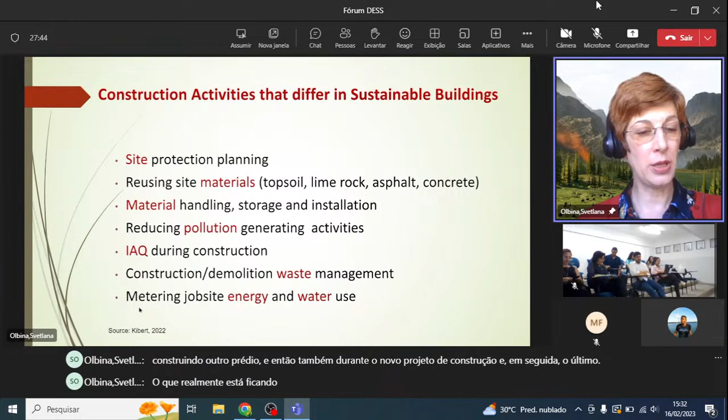And then the last one, which is really getting more momentum here in the States by construction companies, is that they monitor how much energy and water they use during actual construction on the construction site. So these are some major activities in general that could be done differently on a sustainable project.

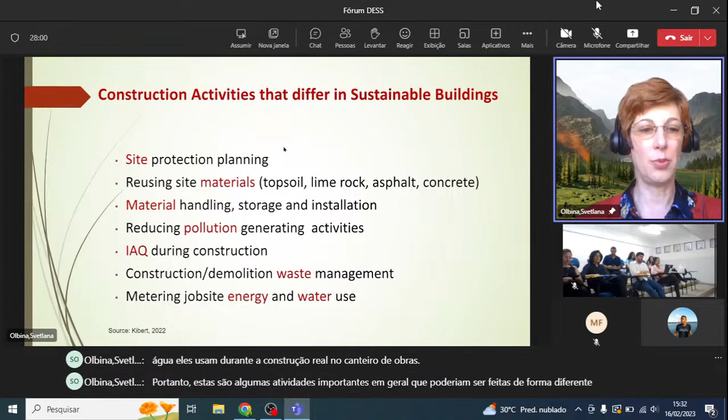So moving to the rating systems, if you can raise your hand, how many of you have heard of LEED? I can see the classroom, so that's good. One or two, three. Okay, and then the Living Building Challenge - I just want to see how much I should cover - and then Envision.

And I apologize, they're all US based except for LEED. LEED is internationally known, and actually in my sustainability class I showed last year an example of a building - a residential project in Brazil that got an award for the LEED project. I didn't put it in this presentation because it's out of scope, but I know it's implemented in Brazil too.

So all these rating systems are basically like checklists that you go through. They're all sustainable approaches, either in design, construction, or operation of the project. And when I'm talking about project, it could be a building, it could be infrastructure.

And then you go through this checklist, and depending on how many criteria your project meets, you will earn a certain number of points. When you add these points, you fall into a certain category and you get certification for the building. And please, if you have any questions, just stop me, interrupt me, jump in. I'll give you some examples of LEED in a moment.

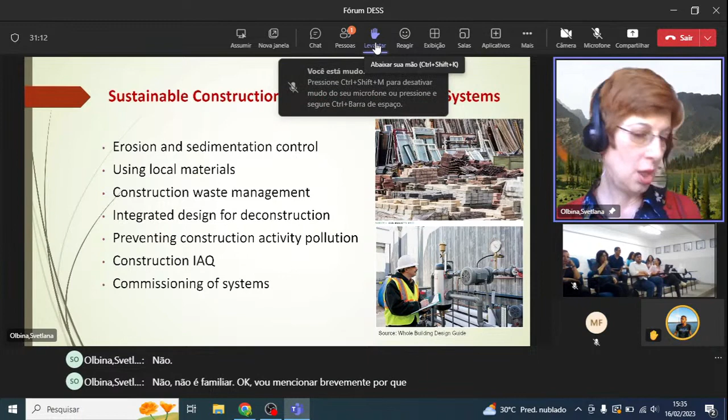No, not familiar. Okay, I'll mention briefly why commissioning is important and some flaws of the rating systems, including LEED.

LEED originally was focusing only on design. So we have a design team, including architect and mechanical engineer. They will design the mechanical system and run simulations in the software, and the software will give us the output and say this building will perform great, it's going to be low energy consumption, we're going to have good ventilation of the building.

However, some of these software are not always accurate, and it can misguide the designer. So what we need to do during the construction phase, before we install the mechanical systems like the air conditioning system, is make sure that system is working properly. That's commissioning. Once it's installed, we also want to run the system to ensure it works properly.

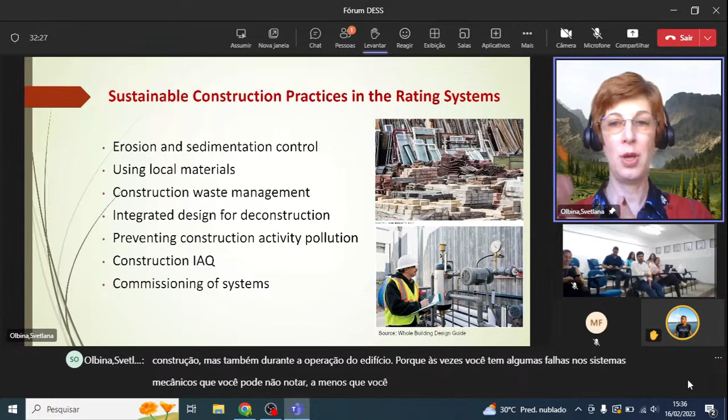This commissioning could happen during the construction phase, but also during operation of the building, because sometimes you have flaws in the mechanical systems that you may not notice unless you look at your energy bill and suddenly notice it's much larger, so maybe the mechanical system needs to be calibrated again. So commissioning is basically inspecting and testing of the systems.

Is there a question in the back? No? Question? Emilia, if you can unmute if there is a question. I have a question.

It's probably an easy question, but I just don't know. I've never heard about rating systems, so I don't know if that's an international concept or...

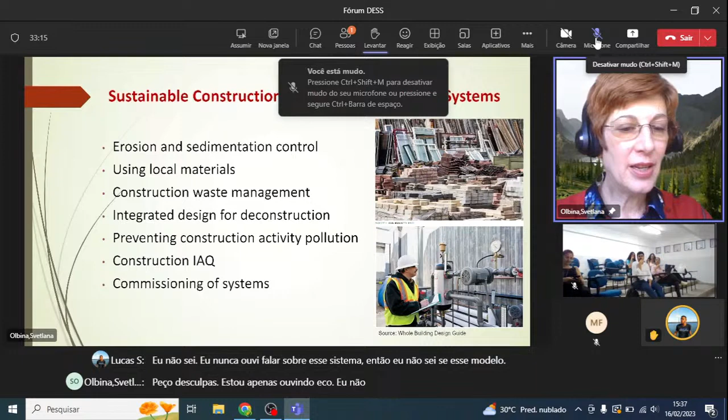I apologize, I'm just hearing an echo. I don't know if a student can come closer, or Emilia could maybe repeat the question. Turn off your mic a little bit. Oh, my mic, yeah, okay, I can mute. Okay, thanks. I am sorry, I didn't hear the question. Emilia? I don't hear anybody now, or I don't see anybody. Yeah, is it okay now? Okay, now I can see you.

Yes, great. Okay, so it's an easy question, but I've never heard about rating systems. So is it an international concept, or does each country have its own rating?

Are you asking about the quality of the mechanical systems, if it's rated, or about rating systems? No, it's about the rating. I suppose there are a few rules that the construction has to match. Does every country have its own rules, or is it like an international thing?

There are international ones, like BREEAM. It was created in England, but many countries use it. AQUA, which is HQE, is from France, but many countries are using it; Brazil adapted it and called it AQUA. LEED was created in the United States, but is universally applicable, and if any country wants LEED certification, they have to go through LEED in the United States to certify it. But each country also created their own ratings, like Brazil has Selo Procel, Selo Casa Azul, Selo B. They have many. Each country also adapts their own, but there are some international ones.

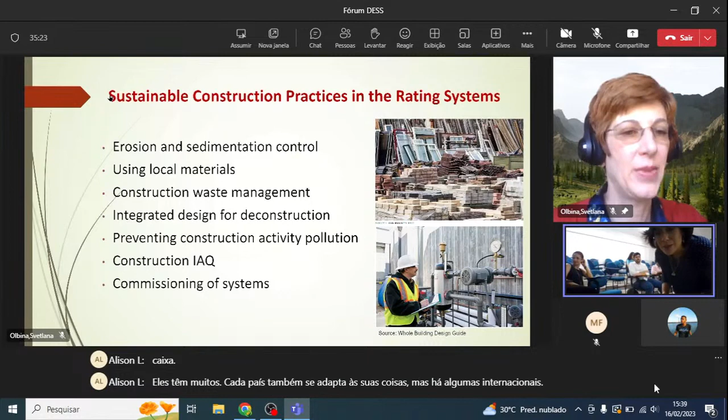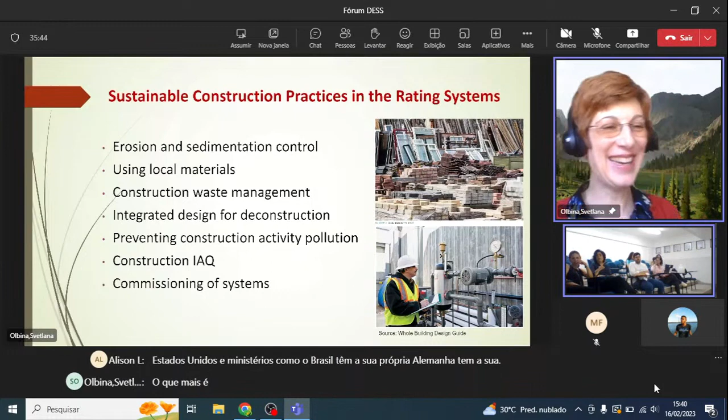Is that correct, Svetlana? This is correct. What's happening is LEED is gaining momentum around the world. It originated in the United States, and Emilia is right, Brazil has their own, Germany has their own... is it possible to mute? I'm sorry, it's just an echo. So yeah, Emilia is right, and it's a great question.

If you want to go with LEED, for example in Brazil, you will need to prepare the certification documentation yourself, but then you need to go through USGBC, the United States Green Building Council, which is a third party, and they verify your project. So we cannot just say, I think it's a LEED project, and they give it to us. You need to go through their process.

And there is Green Globes that originated in Canada. Singapore has their own. So yeah, Emilia is correct, there are so many different rating systems, and there is no one universal one. But LEED is kind of the most popular here in the States. And I do agree, I will not show that today in the presentation because it's a different lecture.

But the buildings here in the States that are high performing really didn't aim to go for LEED or Living Building Challenge. They just wanted to do the right thing. And then eventually, because they did design and construct great buildings, they got both LEED and Living Building Challenge. And some of them WELL.

WELL is another rating system that we use here that focuses on building occupants. In terms of performance of mechanical systems and energy consumption, we follow at minimum International Energy Conservation Code, but it's not mandatory. It's really interesting that it's based on the city and the county, and we could adopt it or change it. But in general, we go by that International Energy Conservation Code, which is not as stringent as LEED and Living Building Challenge.

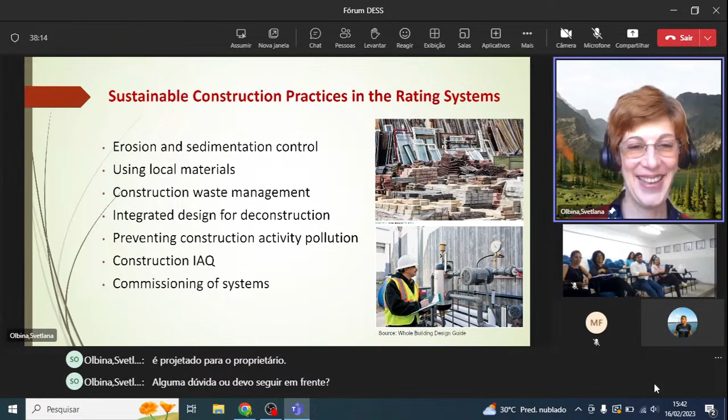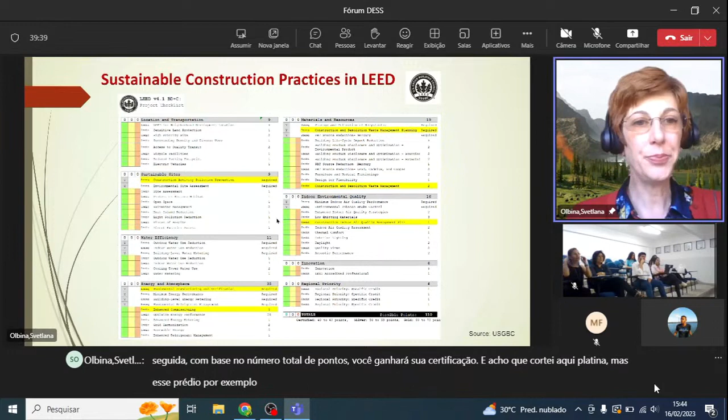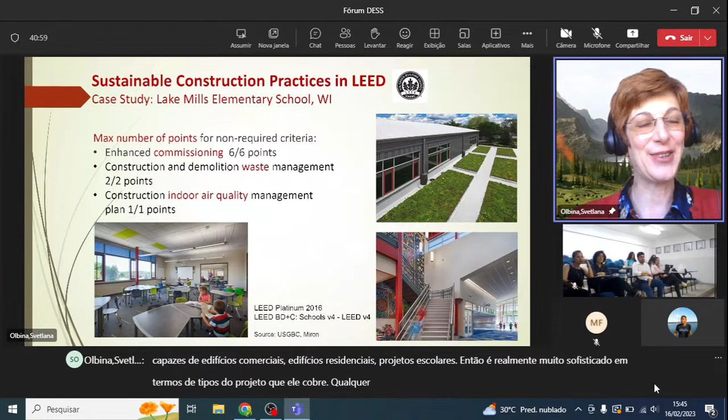LEED has several different LEEDs, it's not only one universal LEED. So we have for commercial buildings, residential buildings, school projects - it's really very sophisticated in terms of the types of projects that it covers. Any questions about LEED before I go to LBC? No, okay.

Are you familiar with salvaging as a term? Do I need to explain? If you raise your hand, I will understand. I should explain maybe - yes, okay.

So, for example, at the end of the life of the building, if it's demolished or deconstructed, we want to be able to salvage that material and then reuse it on another project. Here in Fort Collins, where we are located, we have a store where you can go and buy salvage material and reuse it for another project.

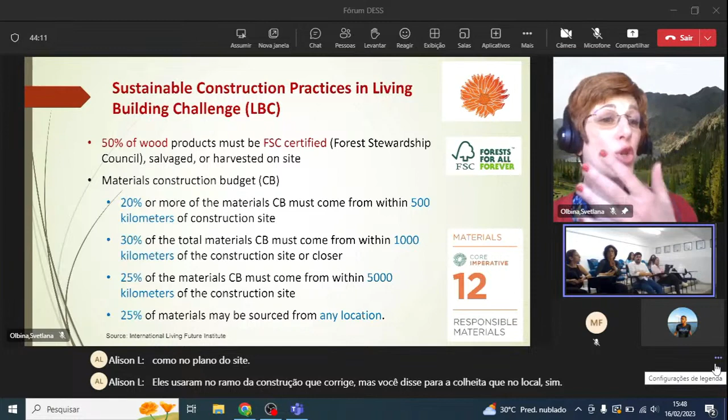I need to unmute. The point is to minimize that transportation, right? Because it's time and cost, and then CO2 emissions - that's the problem. When I lived in Serbia, everything is local, right? We build from brick a lot, and brick is manufactured within 25 kilometers, so it's never far. We didn't have that luxury of importing materials from other countries because it's very expensive, so out of necessity, we use local materials.

So going back to Living Building Challenge, they want all materials, and they kind of broke it into 4 equal categories in terms of amount of materials coming from different regions. 20% of materials will come within 500 kilometers. In the United States, 500 kilometers is not a lot because we are a big country, and maybe it's similar in Brazil. But in Serbia, that's the entire country, right? So it needs to come from very close proximity.

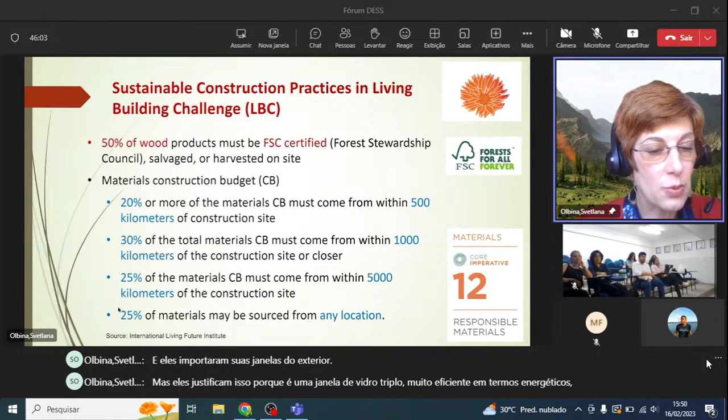Then another 30% within 1,000 kilometers, and then 5,000 kilometers. So if you want to import something overseas, it's not really sustainable, but that could fall within this 25% of materials. We do have buildings - we have a Living Building Challenge building that was first certified in Seattle, and they imported their windows from abroad. But they justified that because it's a triple glazed, very energy efficient window that could fall in this 25%. So there is a little bit of flexibility.

Another category that Living Building Challenge looks at is net positive waste. So for example, if we don't have any waste during construction, that will be zero waste. But if I'm reusing some materials, like we talked about salvaging materials, then I'm having this net positive waste - I'm now reusing previous material, I'm not using raw materials anymore.

So that takes me to that category of net positive waste. The requirement of Living Building Challenge is to have one salvage material per 500 square meters. That would be most likely commercial building, I would think, in Brazil and here in the States. So for every 500 square meters, one salvage material, which I think is not hard to achieve. It's possible, right?

Another requirement for this rating system is that we want to collect this waste material. So again, going back to waste, going back to reusing or recycling, there needs to be a plan. And then they want us to divert about 80% of all construction waste from the landfill. So now we need to be creative and think how we can use this waste for something else.

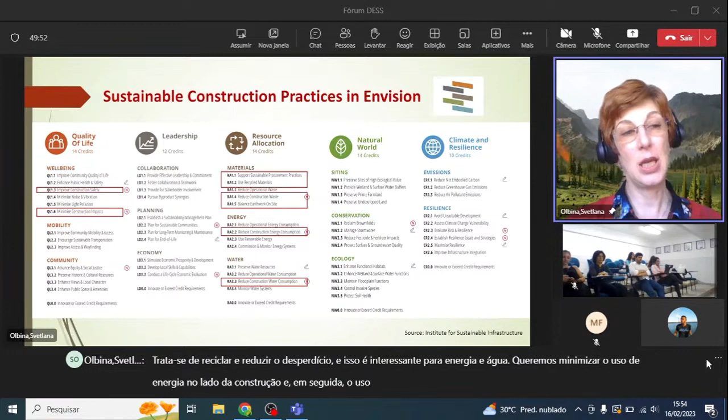This is interesting for energy and water. We want to minimize the use of energy on the construction site, and then use of water. Here in the United States, we use potable water for concrete mixing. We need clean water, which is fine for concrete, but it's potable water. So it's a huge problem.

Is it the same in Brazil? Or I think we have somebody working on concrete, one of the students. No? You're on mute—I need to unmute myself.

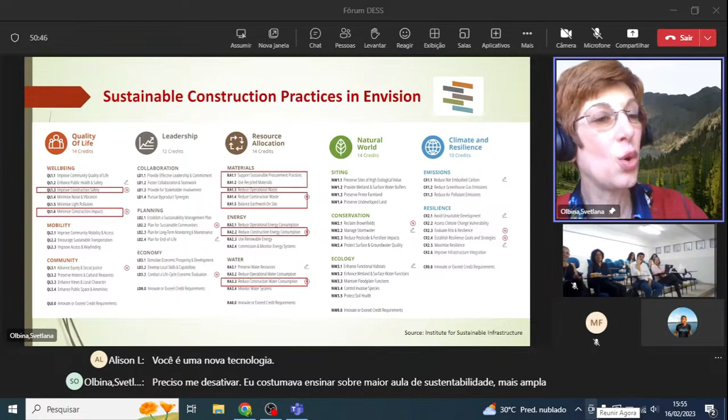I used to teach a bigger, more broad and comprehensive sustainability class, where we talked about quality of water and scarcity of water. I know there's a problem with water availability for people in Brazil, Africa, and Asia. Here in the States we're spoiled because we have potable water all the time that is good quality, but we use the same water for concrete, unfortunately. So it's a huge problem.

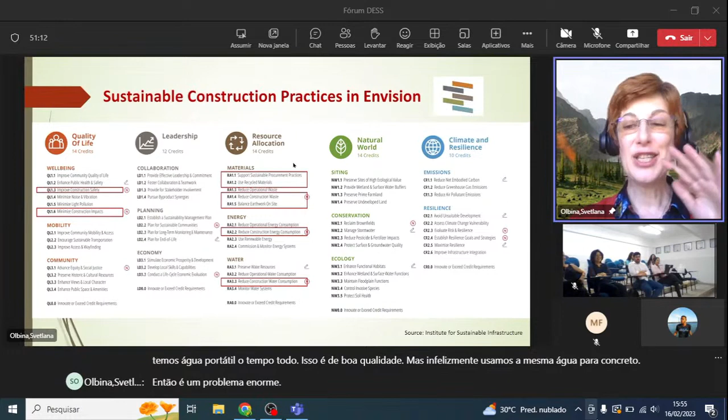Anyway, this is just a brief intro to rating systems and how they consider construction activities. Now we're ready to move to more specific topics and how we can do things differently during the construction phase. I was thinking of focusing only on 5 major topics, since there are many others, but we have limited time and maybe we can go a little more in depth: how we protect the site, how we handle materials, indoor air quality, waste, and construction equipment at the end. So these are some topics we can look at.

So if I assume you've heard about controlling erosion on the site—is that right? It's a civil engineering program, right? Let me mute. Here it's a very big problem.

We have some hills, and the problem is that the population has been constructing on these hills around the city. When it rains, we have—I don't want to say—but slides, earth slides, and people get killed. They try to put plastic to avoid water filtrating and carrying the earth, but we have this problem here in the city.

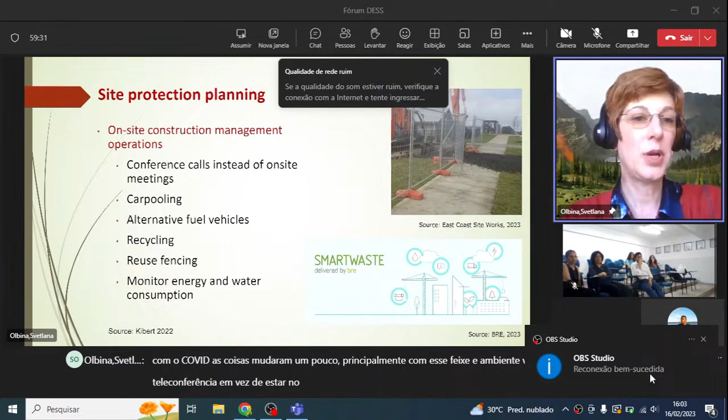It's possible to have a conference call instead of being on site. That's another strategy—it saves time, no driving, no pollution. So if it's possible to do a conference call, that could be a viable solution.

I do like everything in person still, and I wish I were in Brazil, but imagine how long it would take me to get to Brazil and give a one-hour or hour-and-a-half lecture and then go back. So it's really about convenience. Carpooling, I already mentioned.

Here in the States, people are leaning towards electric vehicles, but they're still expensive, even for us. They're not as affordable as a gas-based car, but that's the goal for the future—using more electric and hybrid vehicles rather than fuel-based ones. I'll show at the end a few slides on electric construction equipment.

We already spoke about recycling and reusing fencing. For example, here on the right you can see a picture of a fence that shows the boundary of the site and can be easily disassembled and reassembled, versus one built on site, demolished, and taken to the landfill. So it's really important to think about reusing fencing too.

I found this really interesting software. I haven't tested it yet and I'm not sure if it's free, but it would be interesting to try in class, because it's developed by the Building Research Establishment in the United Kingdom. This organization is famous for developing and administering BREEAM, another rating system—actually the first rating system in the world for sustainable buildings, even before LEED.

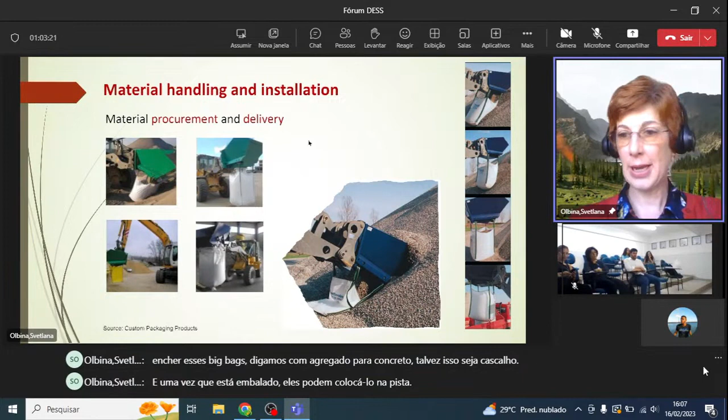If you look at this slide, this is a company that uses heavy machinery to fill these big bags, let's say with aggregate for concrete, maybe gravel. Once it's packed, they can put it on the truck, or use a big crane that will lift these bags and maybe put them on the train. We transport with the train too, a lot, here.

Eventually you bring it to the site, you use the material, and these bags go back to the manufacturer to be reused for the next cycle. It's a very simple strategy, but very useful, and it minimizes waste because we are planning better material use on the site.

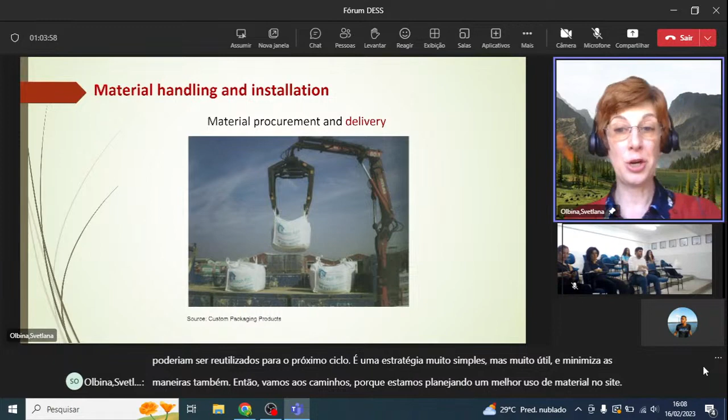I mentioned earlier that usually in a very dense urban environment where sites are small and there's no space around the site, even to park the truck, we may need to do just-in-time delivery. That means if I'm installing a gypsum board for walls or ceiling today, I'll deliver it this morning and then start installing it today.

There are a couple of benefits. One is storing — I don't need to store it on the site since I don't have much space. The second is I don't need to cover it. What is the problem with gypsum when it comes to moisture? Any idea? Maybe I'll stop here and ask the class about gypsum as a material and how it works with moisture.

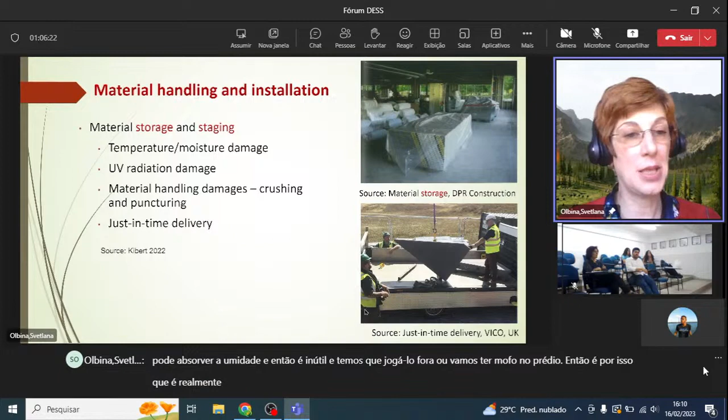Great, that's exactly what I was looking for. There are gypsum boards more resistant to water because we add certain additives, but in general, traditional gypsum board absorbs moisture. That's a huge problem, and we don't want that to happen during the construction phase. If I'm storing it on site and don't protect it, it may absorb moisture and become useless — we have to throw it away, or we'll have mold in the building. That's why it's really good to think about just-in-time delivery, because then I don't need to cover it and I avoid this kind of problem.

Any plastic-based materials exposed to the sun may suffer UV radiation damage and become useless, so we need to discard them and bring new material. If the material site is not well organized, with equipment and people moving around, there's a chance the material will get crushed, punctured, or damaged so we cannot use it again. There are all these little things we can take care of to be more efficient with material.

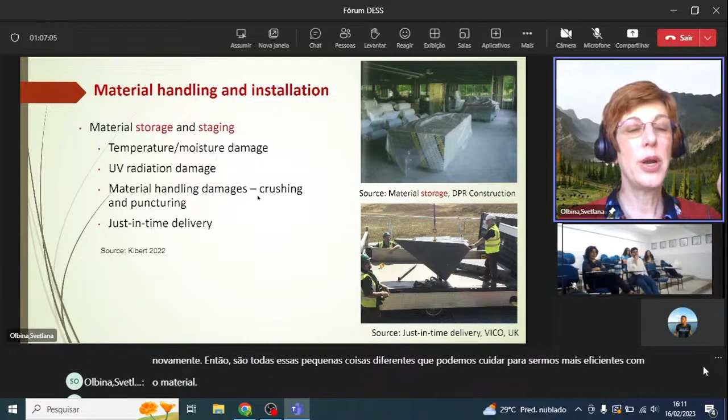So it is really important to protect our workers. That's part of social sustainability. When we teach our students sustainability here in the States, we talk about environmental, economic, and social sustainability. They're all very passionate about environment, but when it comes to economy, fair trade, affordability, equal opportunities, and social sustainability like health, they're not there yet. So it's my job to encourage them to think about these topics. One is worker health, right?

So again, we need to make sure that they're not exposed to VOC. Are you familiar with the VOC term? Volatile organic compounds. I don't know if it's the same term in Portuguese, it may be different, but this would be, for example, off-gassing from carpet, right?

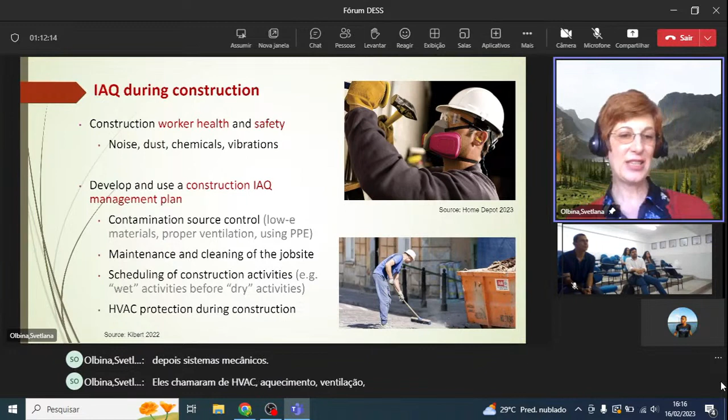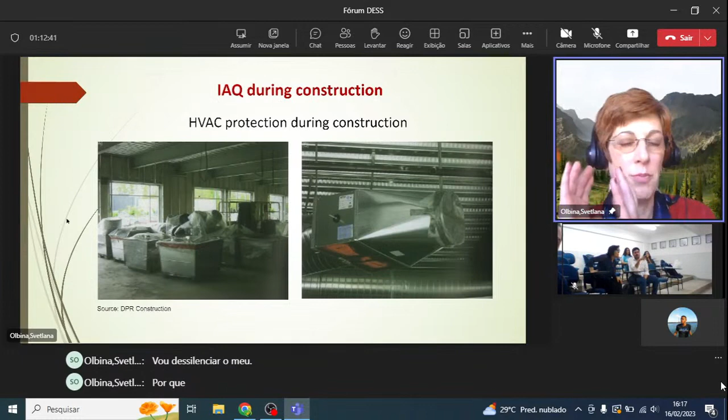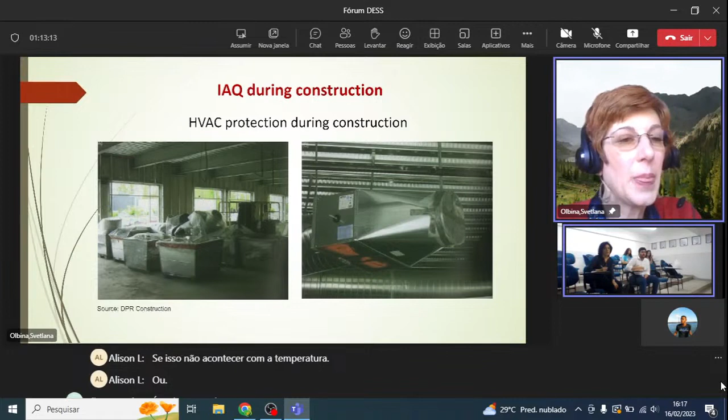It's really about indoor air quality. We want to make sure that no dust from other activities gets inside the ducts, right? And on the right side, you see it's already installed in the ceiling, and it's again covered for the same reason, because if anything enters the ducts and we start running the system, it could be dust, it could be mold, so we want to prevent that.

For the temperature, I would say maintaining the temperature once the building is completed and mechanical systems work will be part of commissioning.

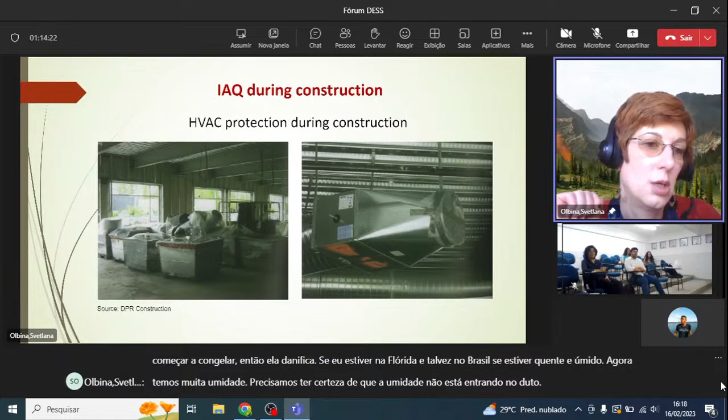I agree, there's another thought I'm having: it could be different in a hot, humid climate versus a cold climate. Like yesterday, we had -7 Celsius, so if I have any water, it's going to start freezing, which damages it. If I'm in Florida, or maybe in Brazil, if it's hot and humid, now we have too much humidity, and we need to make sure that moisture is not entering the ducts during construction. So there are a lot of things we need to think of to ensure good indoor air quality during construction and when the building is occupied.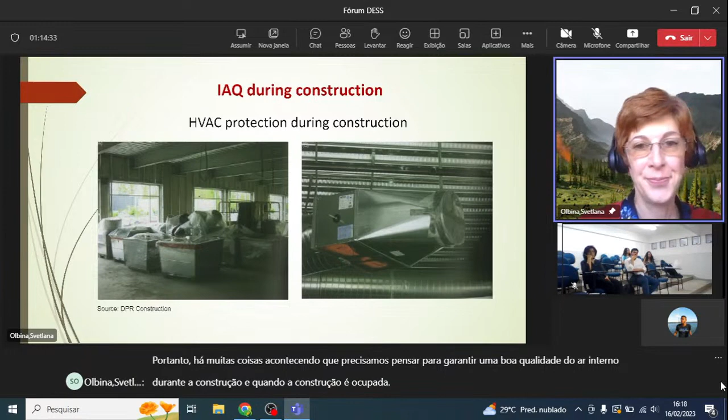Moving to waste. This is not a very encouraging slide, and this is for students doing masters, PhD, and maybe undergrad research—I always explain this in my class. If you look at this data, it's from 2018. I went to the Environmental Protection Agency website where they publish this information. As you know, when we do surveys or research, we survey industry for about a year, then collect and analyze responses and write a report. That takes another year, so by the time data is published, it's already two years old. Probably during COVID they didn't do much.

What's discouraging is when you look at the United States, we had from just construction 136 million tons of waste in '96. That's more than 25 years ago. In about 20 years, this amount went up 4 times—we're producing 4 times more waste in construction than we used to 20 years ago.

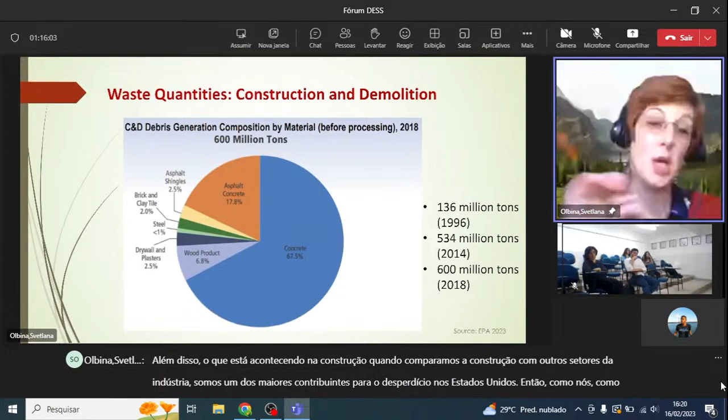Also, when we compare construction to other industry sectors, we are one of the largest contributors to waste in the United States. So how can we fix that? If you look at the type of waste, the large majority comes from concrete, either asphalt-based or regular concrete, and this is more than 85%. So any idea what we could do about that? I do have some suggestions, but since one of the students is doing research in concrete, what could we do with this concrete waste?

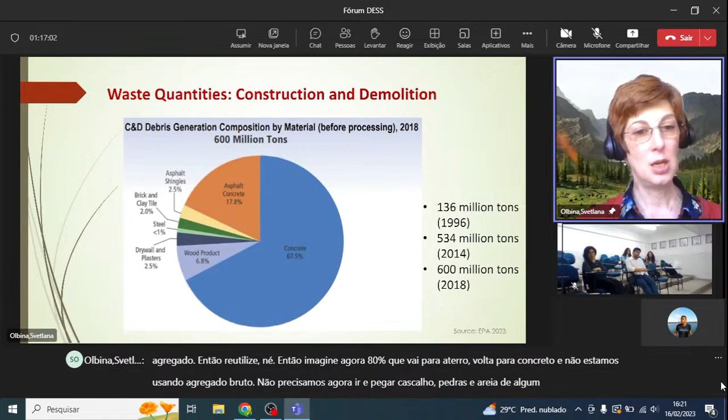Maybe we can grind it and reuse it as an aggregate. That's what we teach our students here, right? And that's what we're trying to do—we can use it as an aggregate, so reuse. Imagine now 80% that goes to landfill goes back to concrete, and we are not using raw aggregate. We don't need to go and get gravel, rocks, and sand from somewhere else. So that's a great solution.

We can reuse brick and clay. We can recycle steel. And then think about reusing these asphalt-based materials or gypsum-based materials again. So how can we recycle, at least if not reuse?

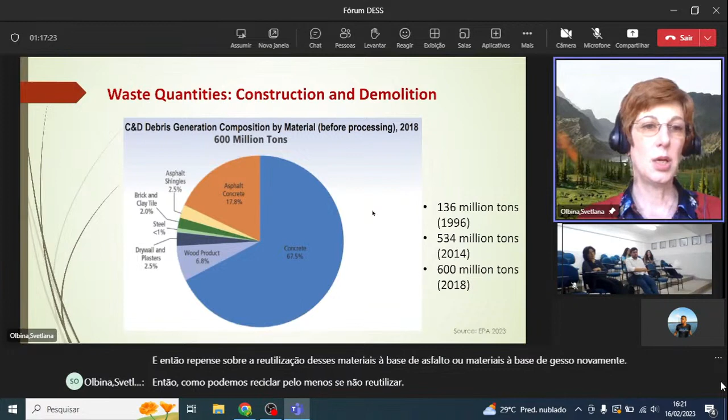Some problems we have here in the States—we like to build big, right? Our houses are huge, which is not necessary. I grew up in a small house with my parents and sister, and it was 100 square meters. In Serbia, that's a huge house; in the United States, it's a small house. It's all this cultural thing, like what is considered normal. So I teach my students we need to build smaller homes because we don't need a big home. Why do we need 200 square meters when we can live in something much smaller?

When we decrease the size of the building, we decrease material use. Also, as an example, when I worked for the curtain wall company, I would design the curtain wall, take quantities off, and order material for these aluminum profiles. Whatever I estimate we need for a project, we'd add 10% to that for waste. Can we be more precise and reduce that waste factor? Can it be 5% or less? That's the goal—to minimize these waste factors.

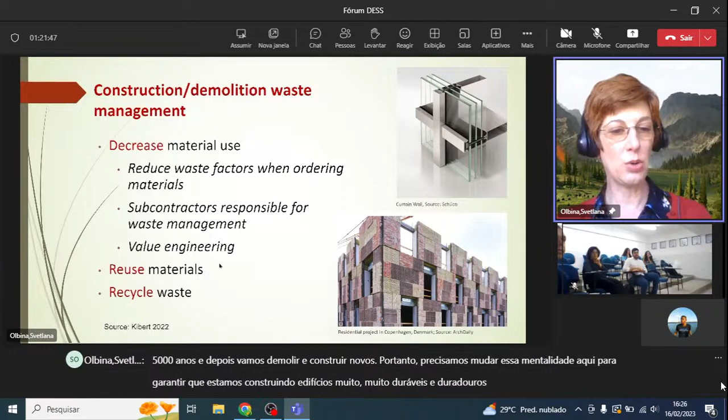So brick is probably the winner, right? And we are always talking about end of building life. Really, in sustainability, we want buildings that last a long time. I'm sure in Brazil you have buildings that last for 1,000 years, like we have in Serbia, some monasteries that have been around for a very long time. But in the United States, we build buildings to last 50, 100 years, and then we demolish and build new. We need to change that mindset here to make sure we are building very durable, long-lasting buildings. And then we already spoke about reusing and recycling materials.

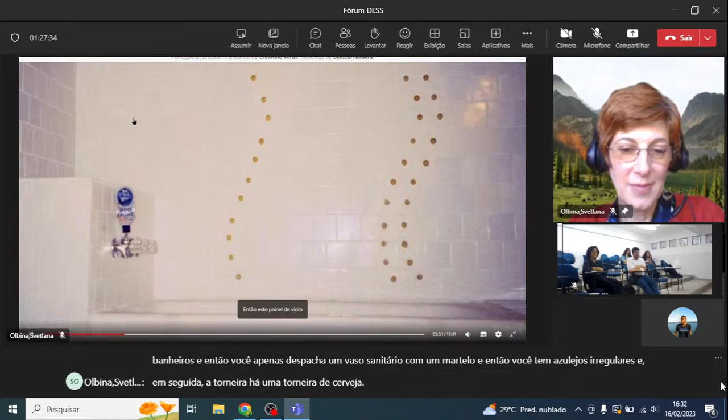This panel of glass is the same panel of glass that occurs in every middle-class front door in America. We're getting tired of it, it's kind of cliched now. So if you put it in the front door, your design fails. So don't put it in the front door, put it somewhere else, it's a pretty panel of glass. But then if you put it in the front door, people say, oh, you're trying to be like those guys, and you didn't make it. So don't put it there.

Then another bathroom upstairs. This light up here is the same light that occurs in every middle-class foyer in America. Don't put it in the foyer. Put it in the shower or in the closet, but not in the foyer.

Then somebody gave me a bidet, so it got a bidet. This little house here, those branches there are made out of Bois d'Arc, or Osage orange.

And these pictures will keep scrolling as I talk a little bit. In order to do what I do, you have to understand what causes waste in the building industry. Our housing has become a commodity, and I'll talk a little bit about that. But the first cause of waste is probably even buried in our DNA. Human beings have a need for maintaining consistency.

So I would stop here because now it's becoming more like a philosophical discussion. But I just want to show this first few minutes because it's a nice example of how he found different materials that would otherwise go to the landfill. It would be waste, and he reused it for the house project. So just as an idea.

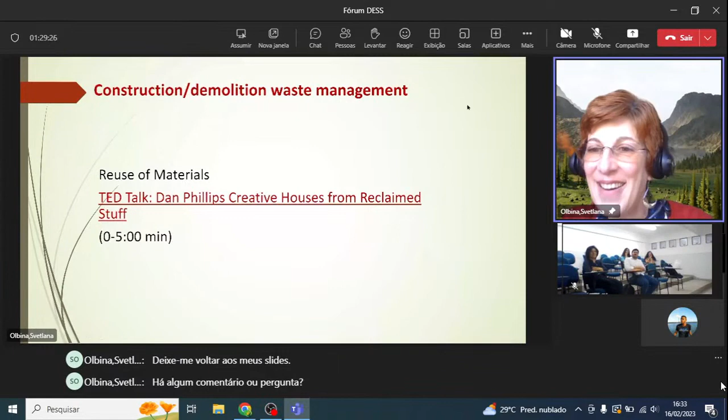What's interesting, when it comes to waste, we can recycle about 75%, three-quarters of all materials. We already mentioned things like wood, concrete and masonry, let's say brick, aluminum and steel, and gypsum board, so major materials we typically use for buildings are recyclable.

We can also prefabricate, I'll show you some prefabrication examples. We talk about buying materials in huge quantities and big packaging in bulk, which also helps with minimizing waste. And then deconstructing a building rather than just demolishing it and reusing that material, so I'll have one example, a short video on that. And then recycling as much as possible of demolished material that cannot be directly reused.

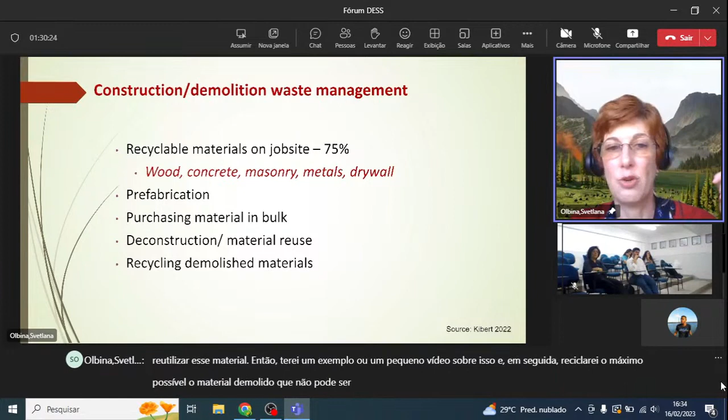So I'm not sure, do you see this kind of dumpsters on Brazilian job sites? You do? Great, oh, that's a great job. So separate materials, right, for recycling.

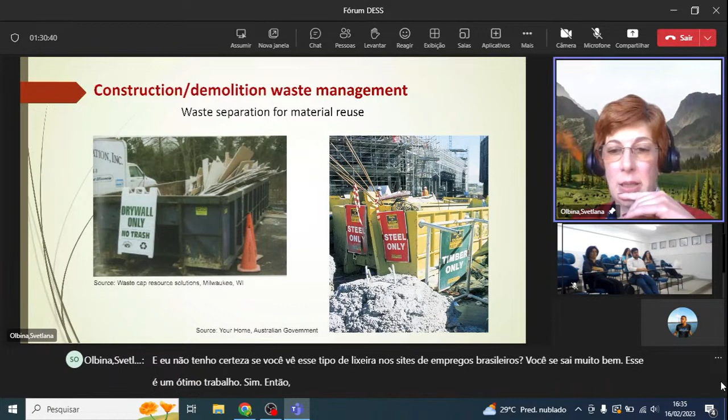And this is their example, like how they have these dumpsters that separate waste by type. This video is coming from the Environmental Protection Agency, and it should run here without problem. I was able to embed it.

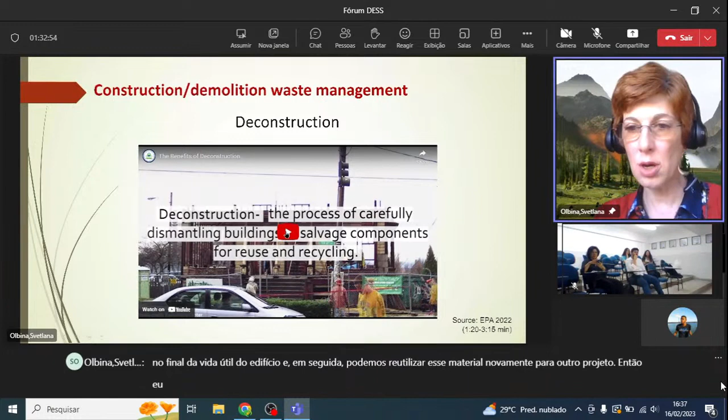So only a couple of minutes about deconstruction. Normally in this country, in the United States, we don't deconstruct, we demolish. I've seen this in Florida, they demolish a hotel, all that waste goes to the landfill, and then they build another hotel at the same site. So I don't understand why that's happening, but that's how it goes sometimes. Deconstruction is the idea that if I build this from steel or wood, I can create connections that could be disassembled at the end of the building's life, and then we can reuse that material again for another project. So I'm going to run this, and if you don't hear me, please raise your hand. Only a couple of minutes, not to take much time.

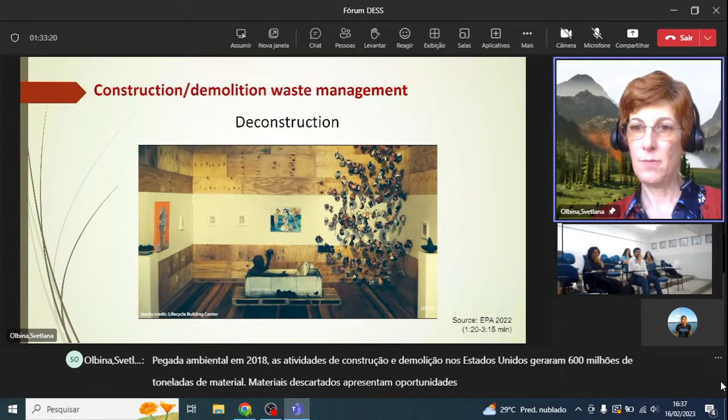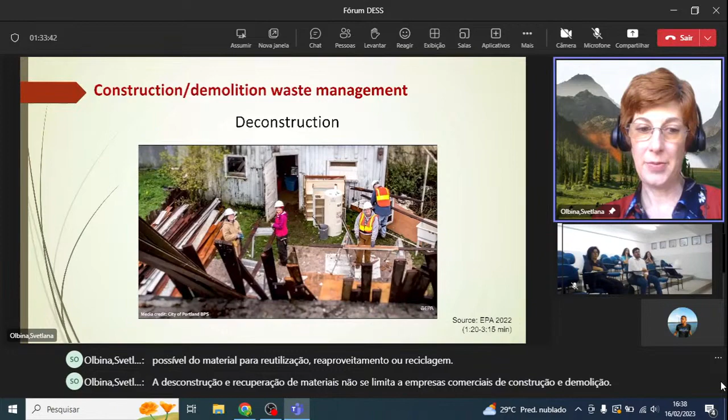Environmental footprint: in 2018, construction and demolition activities in the United States generated 600 million tons of material. Discarded materials present significant opportunities for reuse. Deconstruction is the intentional dismantling of buildings to ensure that you're preserving as much of the material as possible for reuse, repurposing, or recycling. Deconstruction and salvaging materials is not limited to commercial construction and demolition companies. Property owners can also take part in deconstruction and salvaging materials. Consumers can participate in deconstruction by encouraging their contractors to salvage materials instead of discarding them.

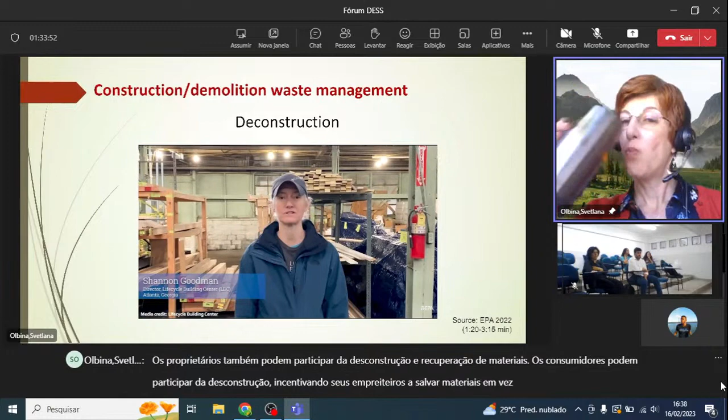Many communities now have access to companies and organizations that specialize in deconstruction. There may be a store near you that accepts and resells donated surplus and salvaged building materials. Deconstruction materials can range from architectural salvage like doors, windows, trim work, and molding, to items removed during home improvement projects and upgrades, like cabinets and other easily removed fixtures. One way EPA promotes deconstruction efforts in the local community is to provide grants to organizations involved in deconstruction and recycling and reusing old building materials.

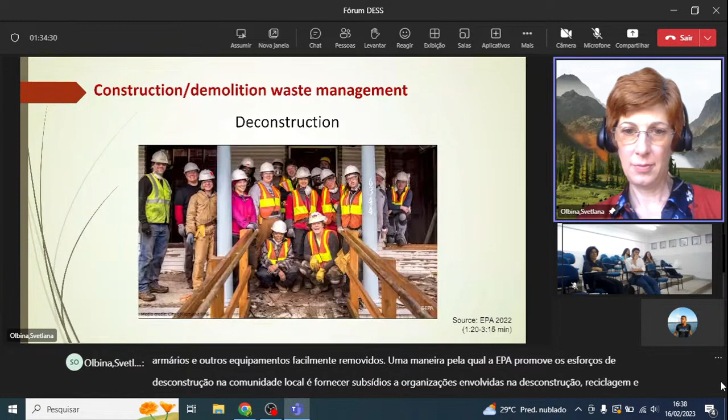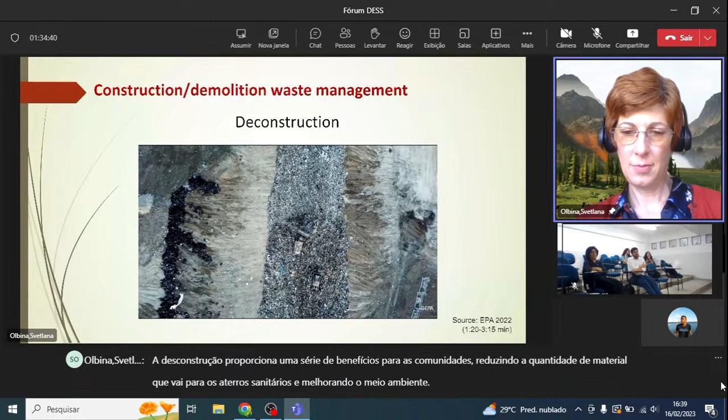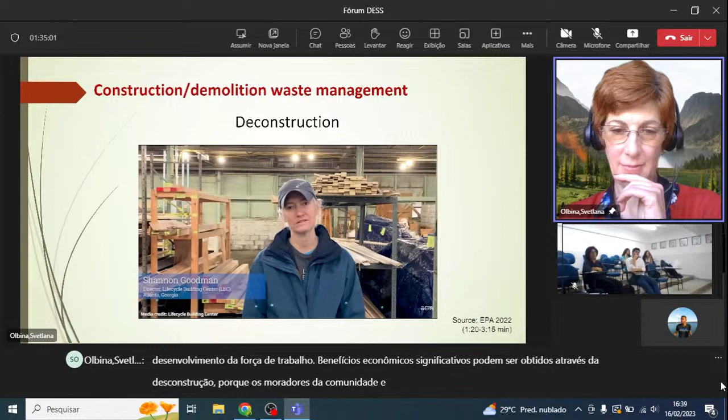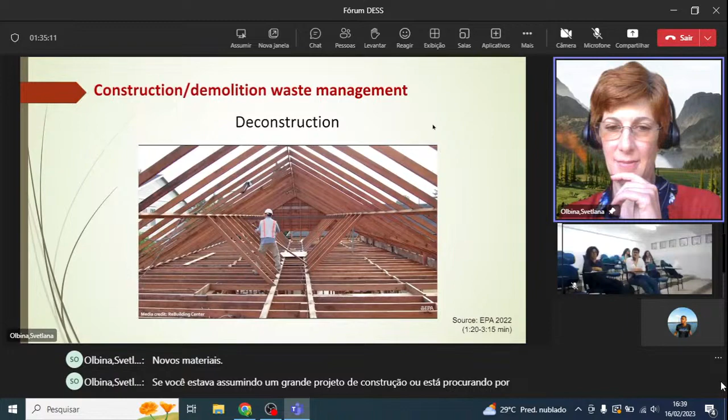Deconstruction provides a range of benefits for communities: reducing the amount of material going into landfills and improving the environment, but there are also opportunities for micro-enterprises, for businesses to be created, for historic preservation, and there's opportunity for workforce development. Significant economic benefits can be gained through deconstruction because community residents and small businesses can access those materials for a fraction of the cost to buy new materials. Whether you are taking on a large construction project or are looking for a few materials, consider deconstruction and using salvage materials. It will not only help your bottom line, it will also benefit the environment and your community.

So I thought this would be— oops, I think I need to move to the next slide. Any comments or questions? Do you have stores like this in Brazil where you can get salvage material?

No? Yeah. Do you reuse materials like this? Do you know? There are some people who do construction that go and buy specifically from some places, but it's not a practice where you have a store that has been collecting all this. In one place there is wood, in another place there's something else, but you have to go after it, and maybe it was just received—once, if you're looking for it, you might be able to catch it. I think for cars there's more. For houses and materials, sometimes the labor takes it home to construct their own houses, without vetting.

To be honest, I don't think it's that widespread here, too. Habitat for Humanity, shown in the video, is an organization that has built homes especially for people in need. And the City of Portland, Oregon, is very sustainability-oriented, very advanced. So it really depends on the community, culture, and type of project, but it's not widespread. But we're trying to educate our students who take these classes. They are now carrying over that idea to the industry, and hopefully the industry will change. So it's not even widespread here.

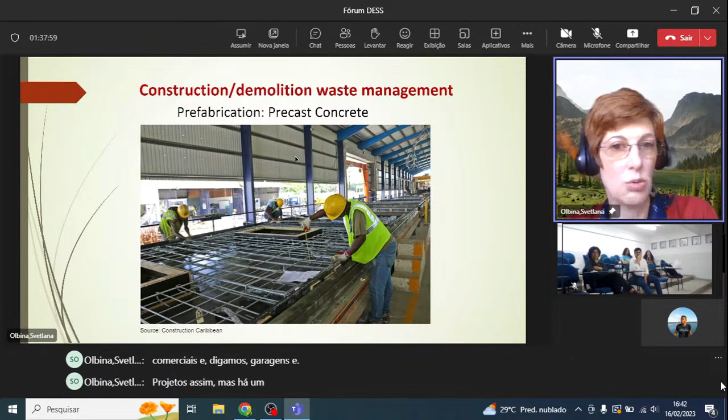Benefits of prefabrication: it's done in a controlled environment in the shop, so workers are safer and not exposed to rain, snow, or cold weather. Quality of the product is much better because it's controlled, faster, and less expensive. So precasting concrete instead of casting in place is a simple strategy. We mostly use it for commercial buildings, like garages, but there is bigger potential to use precast concrete.

Another idea is to use modular construction. Do you use modular construction in Brazil? For example, they have container-type things that already come with the holes. They have it, but it's very rare.

We have this stigma about modular construction unfortunately, but there are high-end hotels in Florida built using prefabrication, so I think people need to change their mind. This project I'll show has a brief one-minute video, built in Los Angeles for low-income and middle-income families. There are 100 units in this building, all pre-constructed in the shop and just installed on site. This project actually got Platinum LEED, the highest rating for LEED. We'll see images of the interior and the internal courtyard. Modular construction is probably the way to go if we want to be sustainable economically, socially, and environmentally.

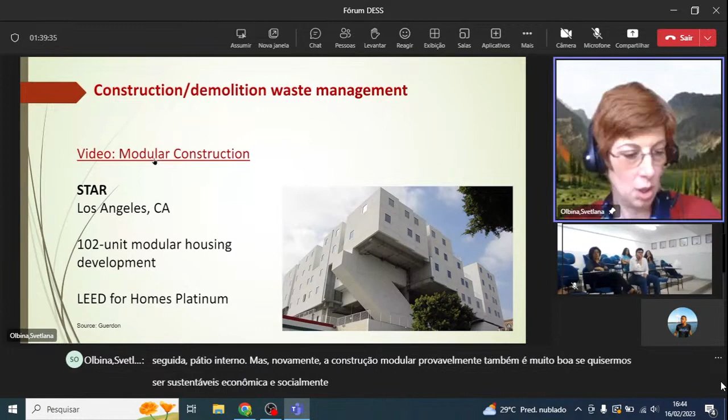I need to switch to another browser to show you this video. I'm getting much better with navigating through Teams. Okay, do you see this house now? There is just music, no other sound.

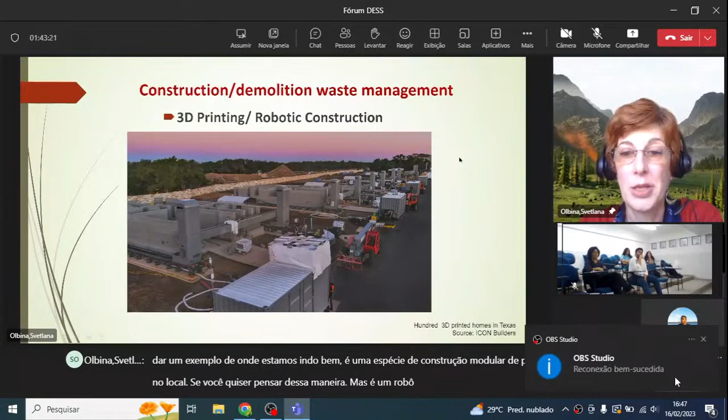Here in the United States, we have fear among our construction workforce that they will lose their jobs if we move more into automation and robotics. But it's a matter of shifting how we train our workforce for different kinds of tasks, so they're not going to be hammering anymore, they're going to be using robots. It's a completely new approach that will probably happen in the near future. Any questions about robotics, maybe?

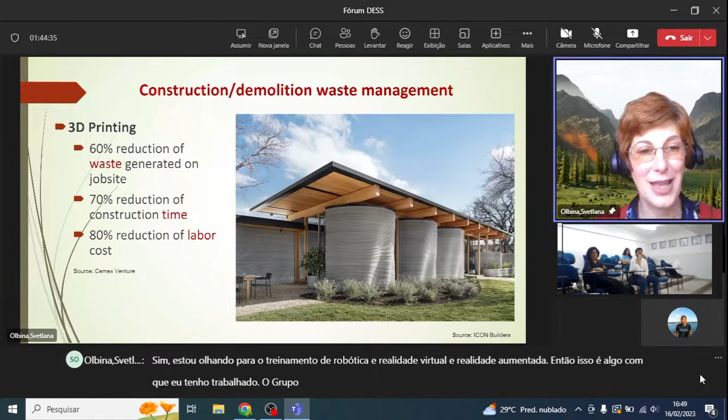I'm looking at robotics, virtual reality training, and augmented reality. That's something I've been working on with a group of colleagues to really take it to the next stage or level. So time-wise, let me see how we're doing with time.

We have only 10 minutes left, right, Emilia? Time flies.

Do you want me to go over electrical equipment, or did I want to hear from the class and students, maybe for the last 10 minutes, if they want to share any of their experiences or have any questions. For electrical equipment, we do have a lot of construction equipment going electrical, like an electrical car if you would imagine, and I can share that at the end. They can run for about 8 hours on electrical power, being charged.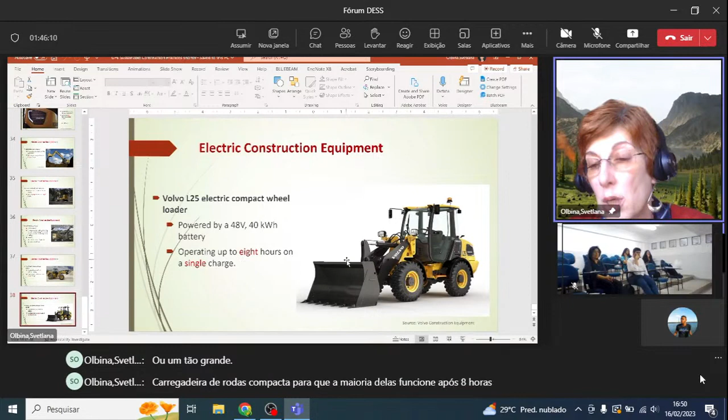I want to ask the class and students if they have any experiences, maybe if you had an internship opportunity and saw something you felt was unsustainable or sustainable that you'd like to share. Any questions for me? Because we're close to the end of class. And I'll mute myself.

Felipe works building highways. One thing that we use a lot is the asphalt of the roadways. Sometimes when the road gets to the end of its lifetime, you have to rebuild it, and we take the asphalt out and use it as an aggregate. We mix it again and use it as a new product.